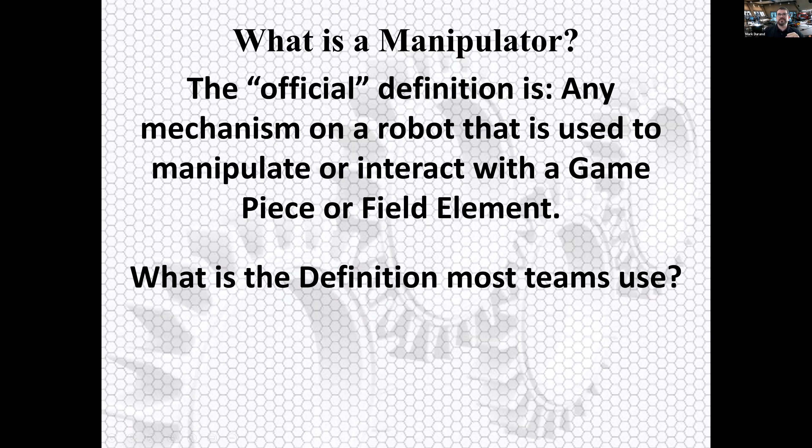The other things we're going to do today, there's going to be more annotation and stamps on the screen because it's hard with the chat. Most kids, they're like, it's the thing that's not the drivetrain—there's drivetrain and then everything else. This session we're talking about game field, and the first question you have to ask yourself is, what are you manipulating? In this one, we're talking more about field elements.

Most of the games in the history of FIRST were game piece only. This is the first year, '92, Maize Craze, they had to drive through corn, that was crazy. The Rug Rage, this was weird. In these competitions, you were on your own—it was one bot, like this one was four bots, each bot was on their own. Same thing with the corn situation. This one was interesting, it's like a giant circle. But again, game pieces only, there was no real manipulation of the field.

95 was game piece only, same for 96 and 97. You'll see, if you've been to my other presentations, that there's a lot of situations where you have these giant exercise balls, and those come up a lot.

Ladder Logic, 1998, that was game pieces only. Double Trouble, same thing here. And now 99, that was a weird year with the floppies.

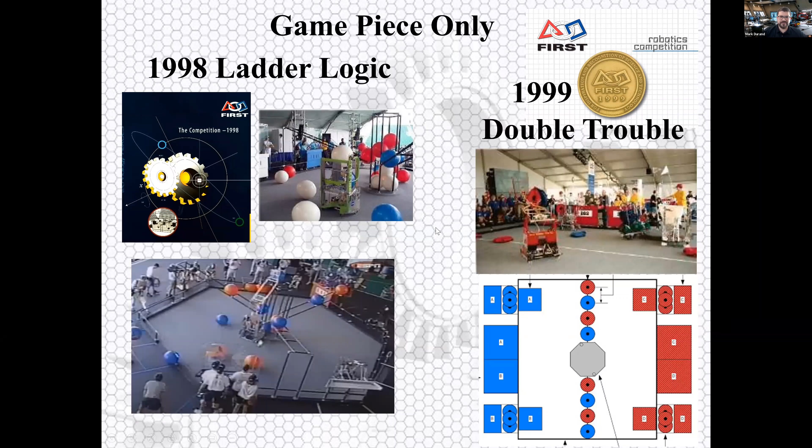But finally, 2001 was the first year we had field elements to manipulate, which was a balance bridge. For those of you this looks familiar, this is the exact bridge used in 2012 Rebound Rumble, which you'll see in a little bit.

First time we did a bar hang was 2000, and that one you're going to be watching for.

Zone Zeal, this is the one people talk about as the famous chokehold maneuver, where a team grabbed all three scoring containers and yanked them over to their own side, but it was game piece only. Same thing with Stack Attack. There were totes, and you could just drive up full on and bash into them, which would have been really fun.

This one, 2004 bar hang. Now I've got to show you the most insane recovery. This is from 2004. We had digital cameras, but digital video was not as common.

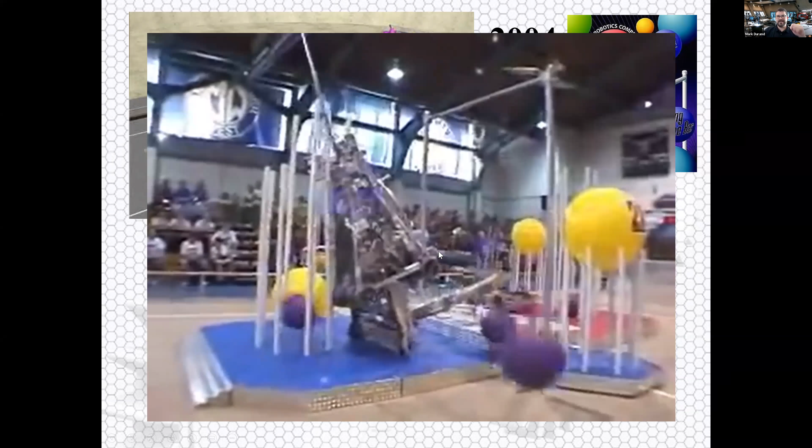They do a replay in a moment here. All right, sorry, the audio is still going.

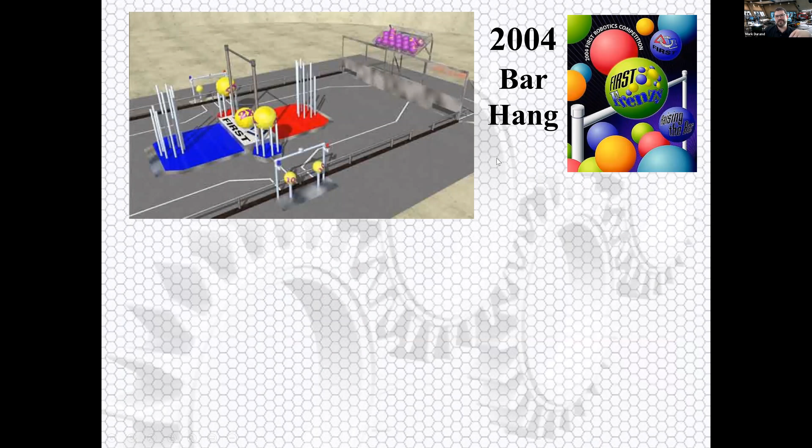I can't imagine what it would have been like to be that driver for that robot, or for the team or coach, when that robot looked like it was about to tip over, but somehow managed. That was one of the first bar hangs where it was crazy high up. The other ones were pretty low down.

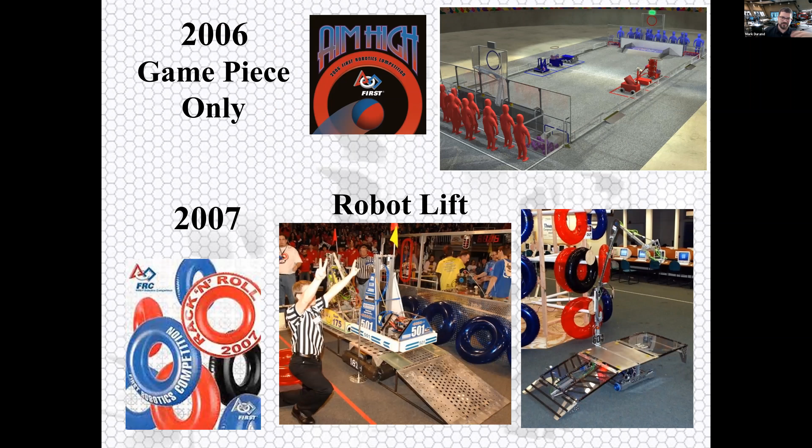2005 was game pieces only. Same. This one, 2007, for those of you who built ramps, which is now in my team, we had ramps and they were disastrous for us. Power Up was not the first year teams were encouraged to have robots drive up on top of other robots - it happened in Rack and Roll in 2007.

The main reason I go through all of these things is because there's nothing new under the sun. When you see a challenge, like in 2012 with the balance bridge, if you didn't go back and look at how teams addressed that the first time, there's a lot of knowledge that's missed. Same thing here - my team, if you don't look back at what teams did in 2007 for getting a robot up off the ground, then you're at a disadvantage.

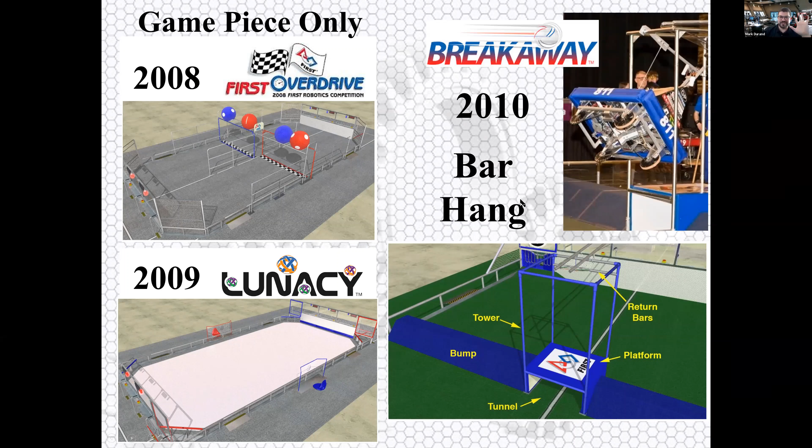2008 and 9 were game piece only. 2010, this was my first year as coach, and I just thought - in this year there was an end game and the robot had to climb and hang from this bar, and you'll see a beautiful example of a robot that does that. But here's the thing - I thought end games were just always the thing, because this was my first year coaching and there was an end game.

2011, you had to manipulate - there was a post, you had to send a mini bot flying up that. 2012, there was a balance bridge.

Right here, if you didn't watch - every year after the game animation release there's Field Element videos that first puts out. If you did not look at those, you wouldn't have known that if you're building one of these at home, it was a 4x8 sheet of plywood, and it had to be strong enough to support 2 batteries 28 inches away from the center. A lot of teams built manipulators that couldn't push with enough force.

The other thing you may not notice in this game - there was a 4-inch barrier, identical to the barrier we had to cross in 2016 during Stronghold. That was one of the defenses.

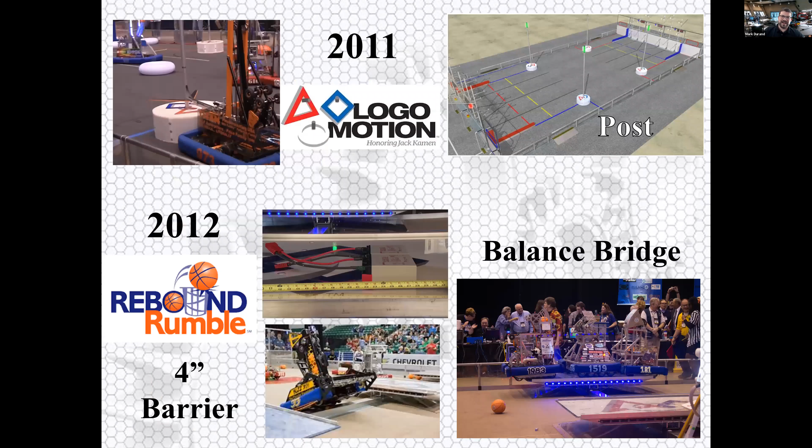2013 pyramids. Now this is why I was shocked when in 2014 there was no endgame. Also, there was this giant bar - 2014 Aerial Assist, we had to throw the giant things over, and there was this giant bar. I thought surely we had to hang from that sucker, and I was convinced the entire season they were going to come out with an update like, oh yeah, there's an end game, but alas, never.

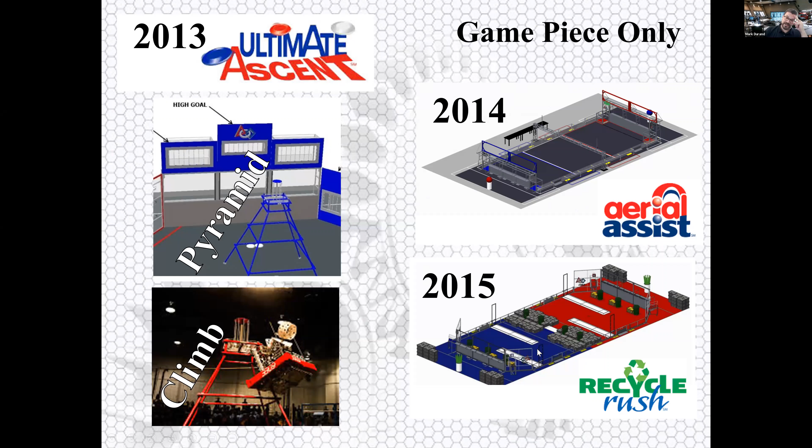2015, no end game, no hanging, no field element mechanism. 2016, they made up for everything - there were barriers and also a hang on top of that. 17, rope climb, one of the only times we had to do a straight up rope climb.

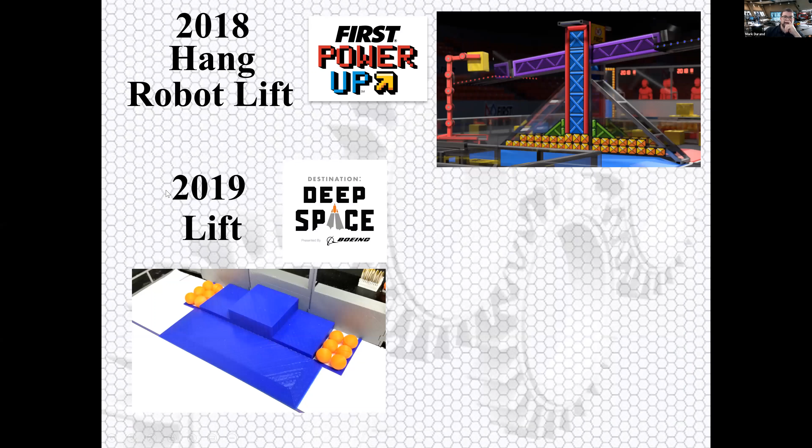2018 was power up, hang from a small bar, and also lift robots up off the ground. Those are not common. 2019 was lift your own robot. 2020, a hang and a spin. This is the first time they've had us spin a field element on the field.

With all of these, I want you to think about the history first. You want to be inventive, creative as you're trying to design your own game, but you also kind of want it to be recognizable as a FIRST game.

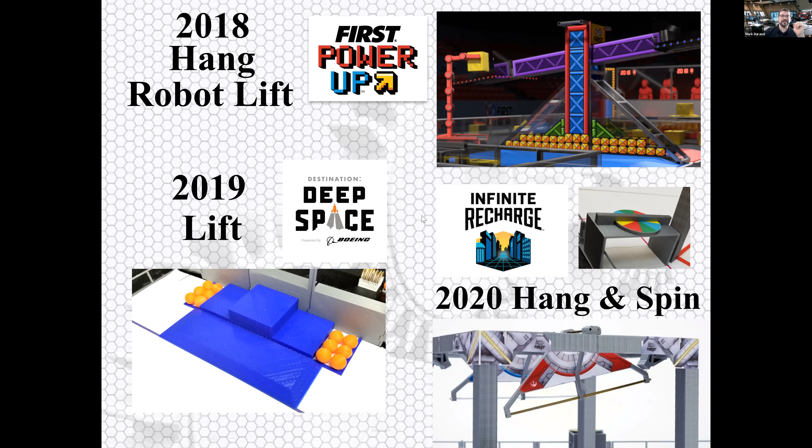All right, so here's the question. You should see an annotate button at the top of your screen, and you should be able to use a stamp, like an arrow, to show me how many times do you think we were required to do a bar hang or hang, lift your robot. Just the grab a bar and pull down.

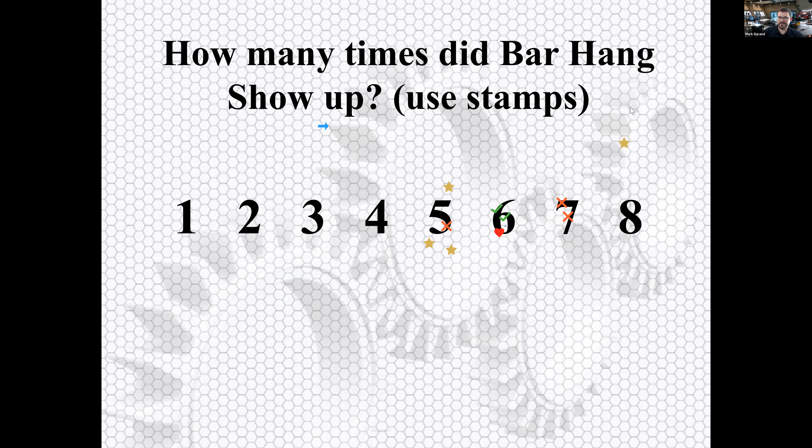I will say this though, these are all really, really good. I think you can make an argument that it was only 5. Some people might even be able to argue 7. But based on my count, there are 6 times we were asked to do a bar hang, specifically a bar hang.

So what I want you to note is these are specifically ones where you had to grab onto a physical bar and lift it. The other thing is that some people might get - so there were 2 times we were asked to climb.

You'll notice that I put Ultimate Ascent into both of these. That's because Steamworks, I would say, is an outlier because we had to climb a rope, and that wasn't a bar. The reason why Ultimate Ascent is in 2 categories is because every one of the first 5 in this category of bar hang, it was just grab a bar and lift up. But Ultimate Ascent was more complicated - you had to grab a bar and then climb to the next one and climb to the next one. So that's why I have Ultimate Ascent in 2 categories.

So if you don't include Ultimate Ascent as just a straight up bar hang, it's 5. If you consider Steamworks to be a climb rather than a bar, then it's 6. So anywhere from 5 to 7 are all correct.

The balance bridge occurred twice, and a robot lift occurred 3 times. In 2 of those it was lift other robots, and 1 of those was lift your own robot. I say all this because I want you to think about these as you're trying to design your own game. So that's all the preamble.

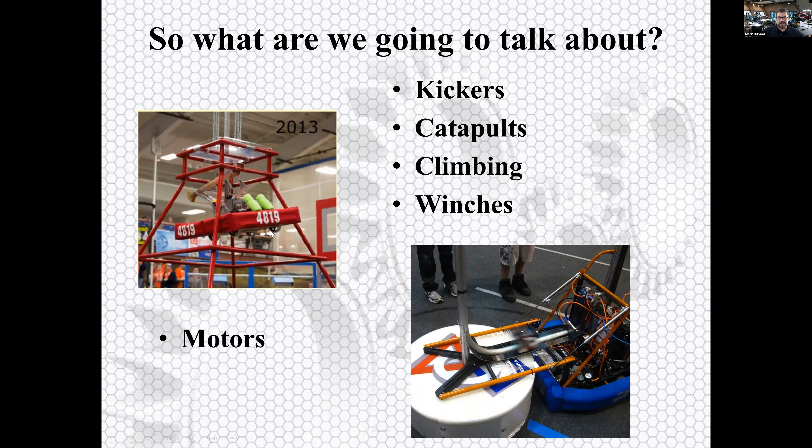I want to get to what we're going to talk about: kickers, catapults, climbing, and winches, and how we do that. These are some situations we're going to be going into. Then we're going to talk about motors and decisions. And I've got a couple other spots where I'm going to stop and ask you guys to do the stamp question again.

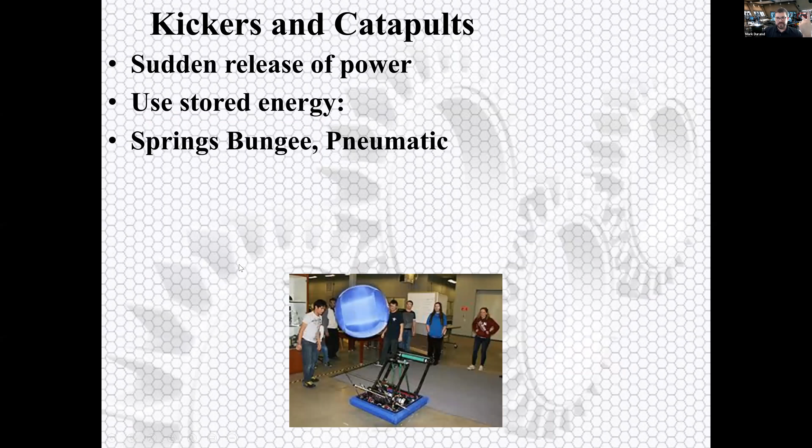So kickers - it's all about a sudden release of power. You're going to want to use stored energy if you can, and what that means is either springs, bungees, or pneumatics. You want to have a good latch mechanism to hold it because that's going to be kind of scary and dangerous. You want a secure lock for safety, and this is the huge problem: you want it to be extremely secure and locked, but you also want a fast, good release. Those are competing needs that you have for your design. This is FIRST, and everything has those.

This is a design from the Minnesota team.

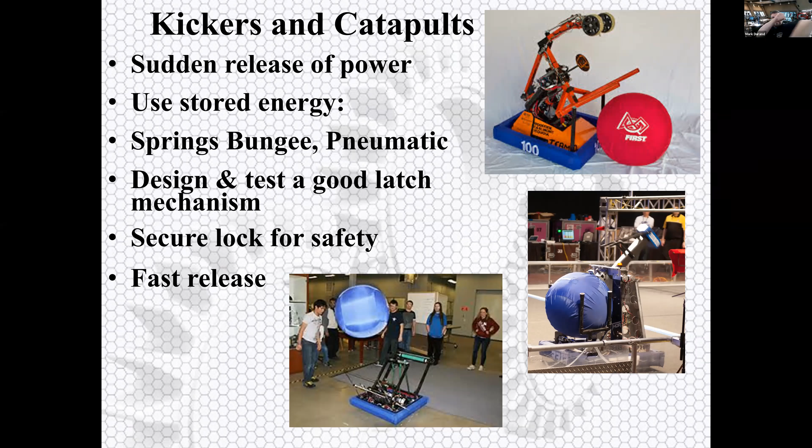They called this Thor's hammer. They're out of Alexandria. It was a really simple, sweet, beautiful design using stored energy. The hammer just had a motor with a mechanism, and once it got past here, there was a little bolt or post that held it. Once it got there, the thing would just smack. Very brilliant, very simple, very easy to reset.

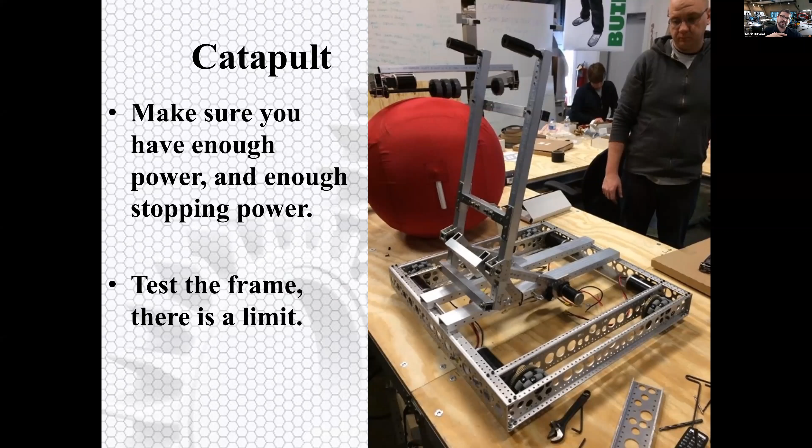Now, catapults. Make sure you have enough power and enough stopping power. This is the thing people don't always think about. They calculate everything needed to send the game piece flying, but make sure your frame can handle it. There was a Robot in 3 Days team building a catapult for Aerial Assist, and they bent the bejeebers out of their frame. You've got to be careful and test it a lot.

The other problem with kickers and catapults is how do you reload them? These are very powerful, very massive amounts of stored energy, so you want a very nice, simple, easy way.

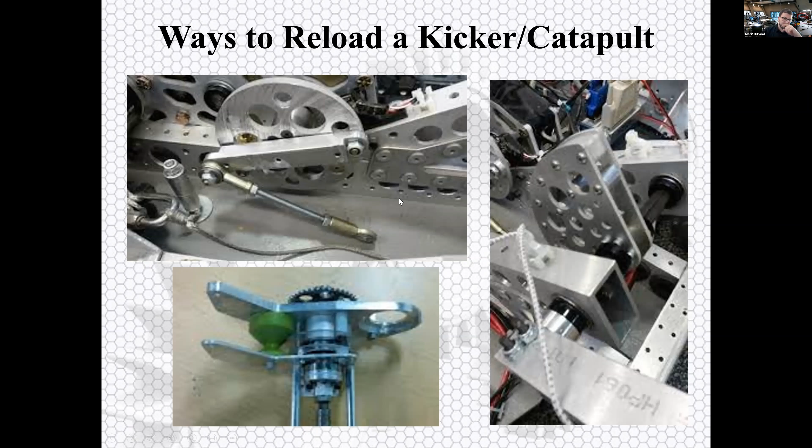This is a couple we're going to get into. These are cam gears, or the choo-choo mechanism, and you can see right here. You just have a motor on a gear, and it's connected at this pin and here, and then this bolt, as it rotates, pulls it down. This one shows it in motion. So once it gets there, whing, the sucker just sends it flying.

Now, this is glorious and wonderful. And yes, thank you—please, if you love these designs, or if you've used them and think they're great, somebody just put a stamp on there. That's nice, I like that.

And this has a lot of benefits. The one major drawback people point out, and you have to be careful for, is you can only support this gear on one side, and that's problematic. There's a lot of forces going on, so that's something to be careful of—contemplate it, think about it, and make sure you're planning for that and can handle it.

This is another type of mechanism where they just have a cam gear, rotating—or snail gear, or bullion gear, depending on what you want to call it. But essentially it all works the same. This one, I kind of love this design. I'm a big fan of this.

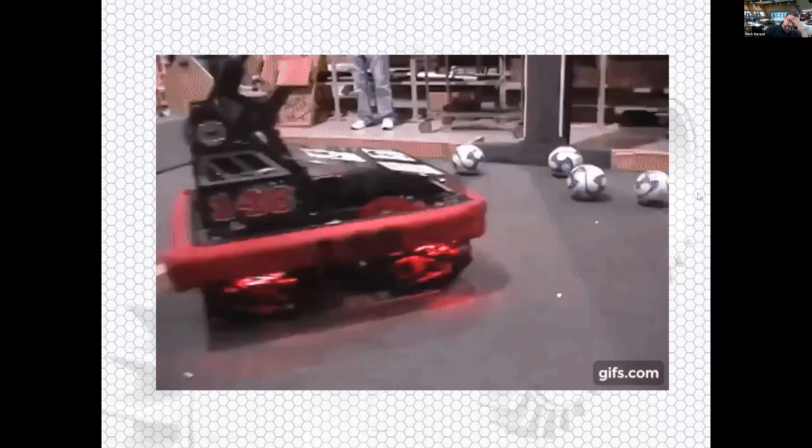This is the robot from the Robo Wranglers, Team 148 out of Texas, and this was the design they did for Breakaway. You'll see that one a little bit later on when they did their climbing. So climbing—this one's a lot of fun. We've had to do this quite a bit.

There's some scary options like this, and some other terrifying ones, but there's two main methods: pneumatic pistons, and a winch.

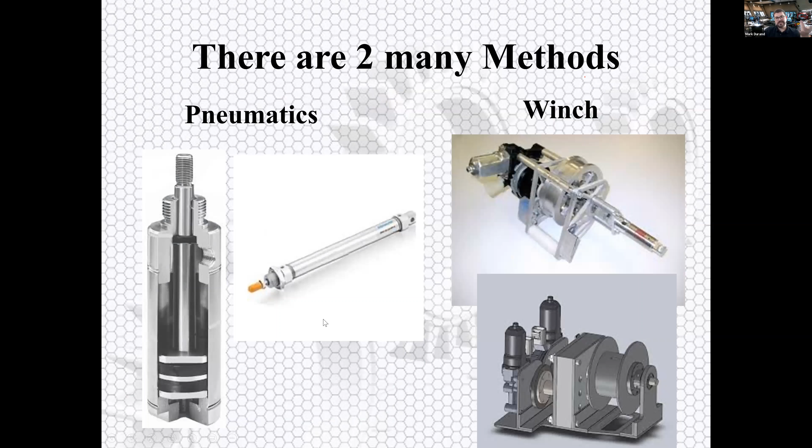Now we're going to try to start a fight here. Vote—what do you think is best for trying to lift your robot in a straight bar lift? Pneumatics or winch? Vote with the stamps—hearts, check marks, or arrows. Some people are typing into the chat. I got 2 votes for winch in the chat. Really? Okay, good. Wow, really? This will be good news for my team, my students.

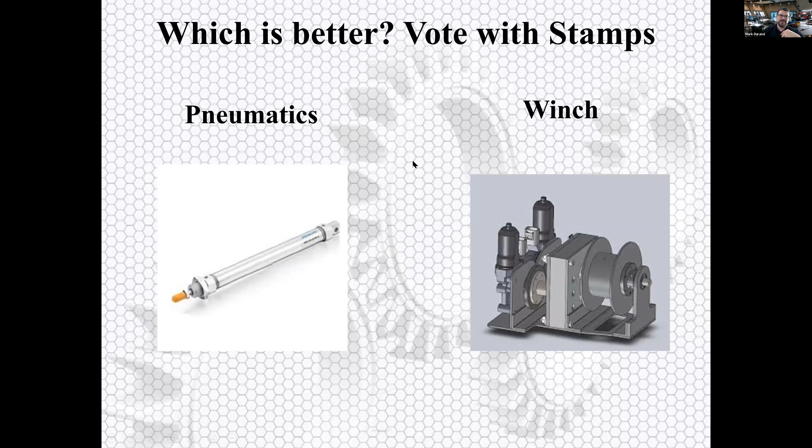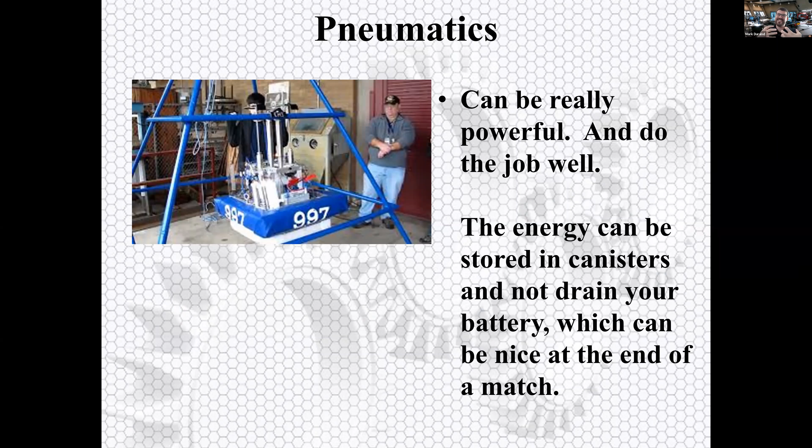Yes, okay, David, correct—the question is how fast? Whenever anybody first asks this, it's always a trick question, because the answer is, well, that depends on what you want. Personally, I'm not a huge fan of pneumatics—I know they're glorious and wonderful, but my problem is we always have like one need, not five. If you're just putting pneumatics on for one thing, it can be problematic or difficult. But there are a lot of benefits to pneumatic pistons for a climb, mostly because climbs are required at the end of the game, almost always, and you can have a ton of stored energy in those pistons. At the end of the game, some teams have batteries running low—you've maxed that sucker out driving around like a maniac, and there's nothing left to lift the bot, which takes a lot of juice. So stored energy is very, very helpful.

Here's the question though—I love the look on that kid's face, that's priceless. You can tell this is the first time they've tested this because he looks terrified. Also, look at those pistons—that's insane, that is an insane length. And some teams are like, you think that's big? We got like 4-foot ones. And I'm like, okay, great, that's amazing. But that's always the question you have to figure out: if the pistons can handle the distance, if you can afford them, we got a question.

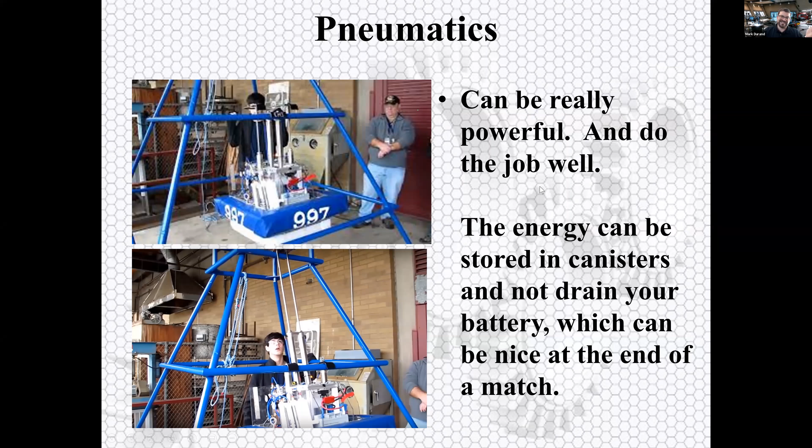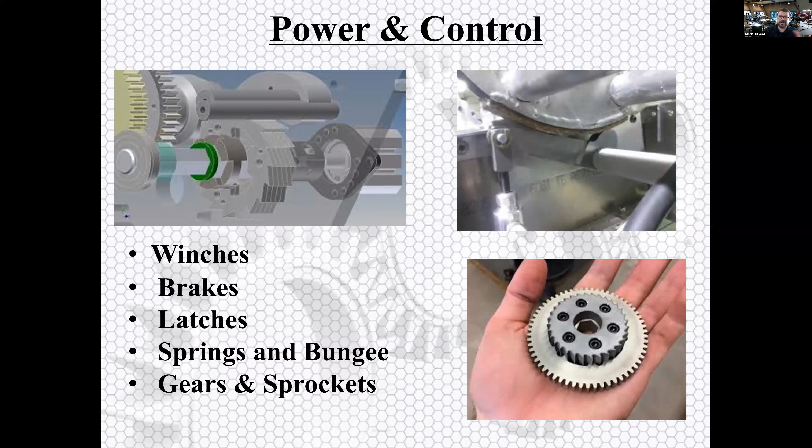Winches. When it comes to winches, it can be a lot more complicated. You need to have brakes, you need to talk about latches. We're going to talk about using them as springs and bungees with gears and sprockets and how those are different. Winches are really great if you need a high torque application. This is another picture of a team climbing in 2010, breakaway.

The other thing that's nice about winches is you can keep it really small. Pistons, you basically have to be able to be half the height of your total height, so that can be limiting and problematic. Winches can be really nice for that.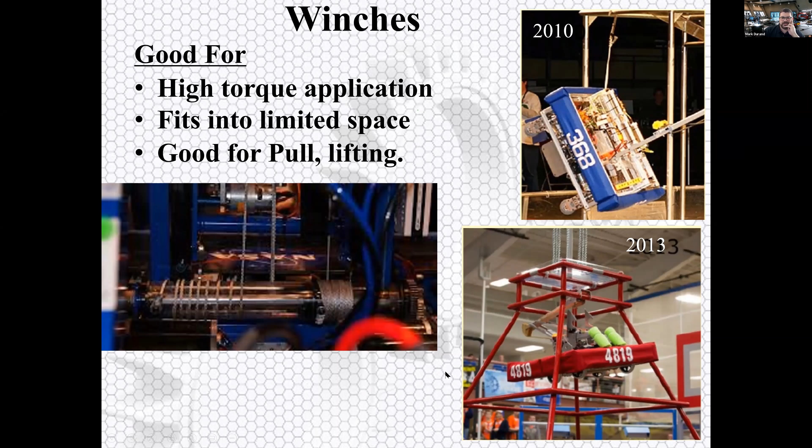Now here's the other: hanging and climbing. This team, if you can climb on a scissor lift, God bless you, that's amazing, that is a task. That's a big ask for a scissor lift, but there are teams that have done amazing with that. This is also pretty impressive here, climbing while lifting another robot. That's some intense stuff.

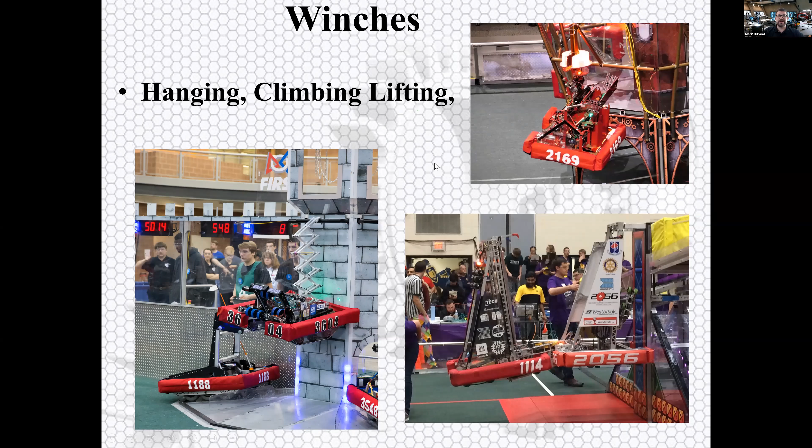And this is where, like this year with Steamworks, you pretty much had to build a winch. There was no other way to climb up a rope than a winch, essentially.

Now when it comes to winches there's a lot of complexity, or there can be. You want to make sure that cable is secured. The last thing you want is for it to grab some wires and rip those out of your robot as they're moving around. You have to be careful. Depending upon what you're using, you need to leave room on the drum, because if you're using a strap, which is what we prefer if we can, the diameter changes as the drum winds up the strap.

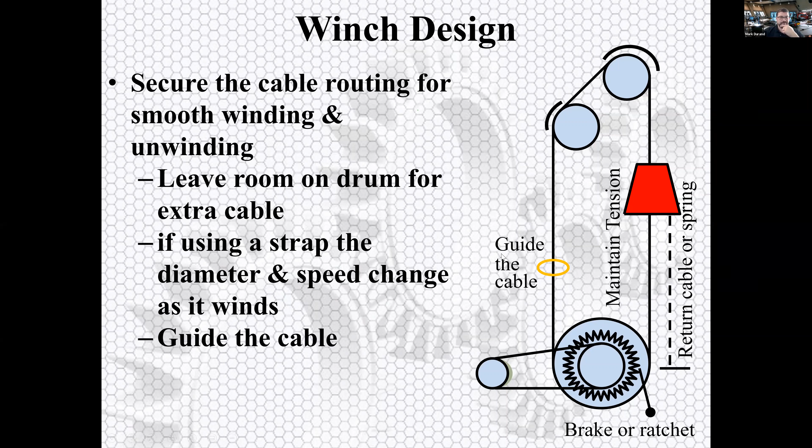So make sure there's guide cables, and make sure you always have tension. It's pretty easy to add a little tensioner on a spring or something somewhere. That's always a nice thing to have in there.

For the return, some people will use weights. Usually we're up against 120, but you can use weights or springs. Springs are very easy — don't make your motor do everything. It's not the end of the world to throw some bungee or surgical tubing on that sucker to give your motor a little extra help.

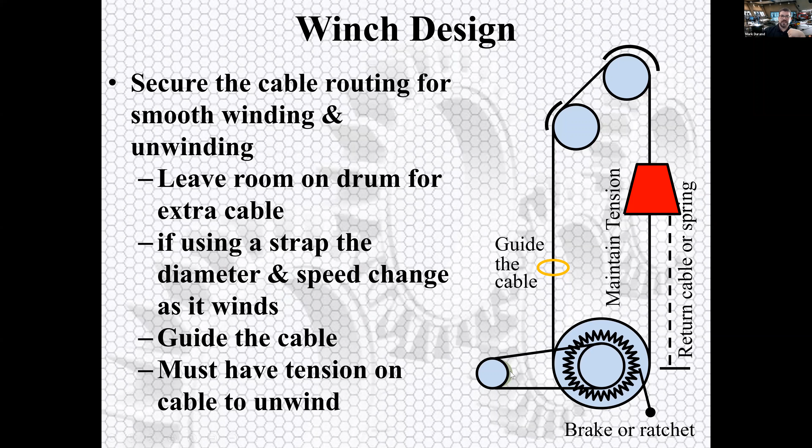But the other thing we're going to talk a lot about is you need to have some sort of brake or ratchet. The last thing you want is to have your motors try to hold the weight of your robot. This is a huge no-no — you're going to blow your motors out.

Now, the other thing: you want to have cable in both directions. I know we're tempted to think we just need to pull it up, or in this case pull down to lift the robot up, and gravity will do that. No, it won't. I know students are like, well gravity's always there, it's reliable. And I'm like, yeah, but no, it's not. It will screw you over. And if you've been to my other presentations, you know that.

It's Murphy's Law — something can go wrong, it will. The other thing you need to know: you should very carefully calculate the torque, calculate the speed, figure out exactly what you need, how much you need. Our rule of thumb is double it, and I'll talk about that a little bit more when I talk about the motors. So gravity return is not recommended.

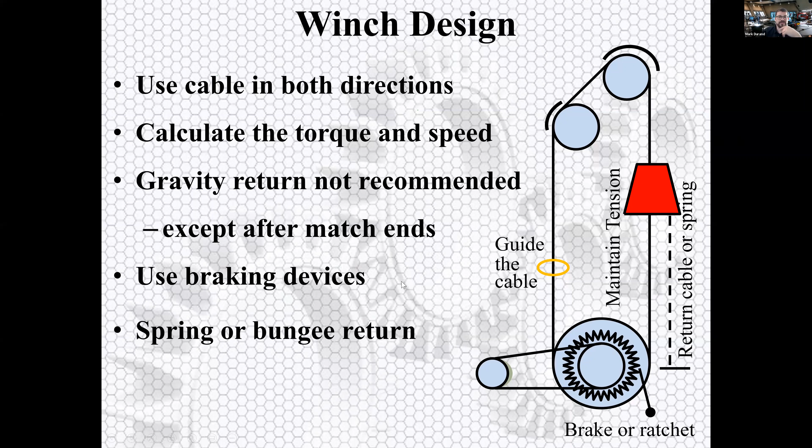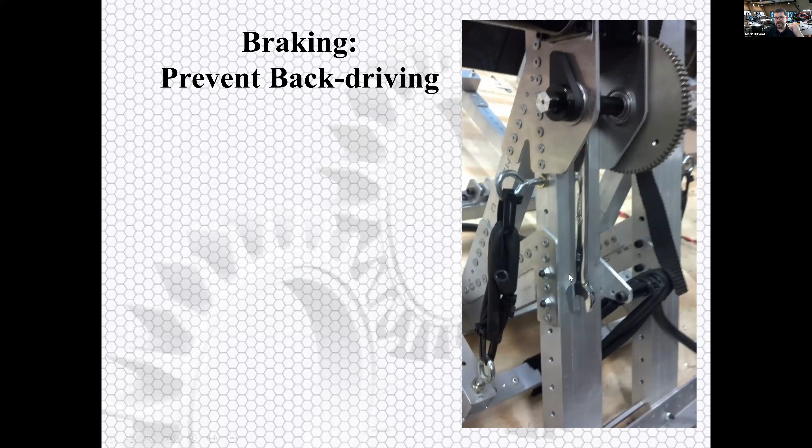Braking device — we'll talk about the braking device in just a little bit. Here's another option. You need to have some sort of braking to make sure you don't have any backdrive. In this situation, this is a catapult, and they've just done lots of bungee here, and you can see, it's sometimes hard to see, but there's a ratchet device.

They took a ratchet, like just a tool, and threw it on the robot because they're using a 1/2-inch hex, so they just used a 1/2-inch wrench. Now, some people will say tools don't belong on the robots — I think Vex has something like that on their website. On the one hand, I totally get it. On the other hand, it works, it works really well, everybody has one, you can get them very affordably. I don't know, man, if you want to be fancy about it, I guess, lop off this part and bolt it down somehow. But if it works, it works. I don't really see the reason behind making teams feel bad for using a functional device.

You have to be careful about this stuff. You don't want — there are some wrenches that are very, very simple, and they're not able to handle the force.

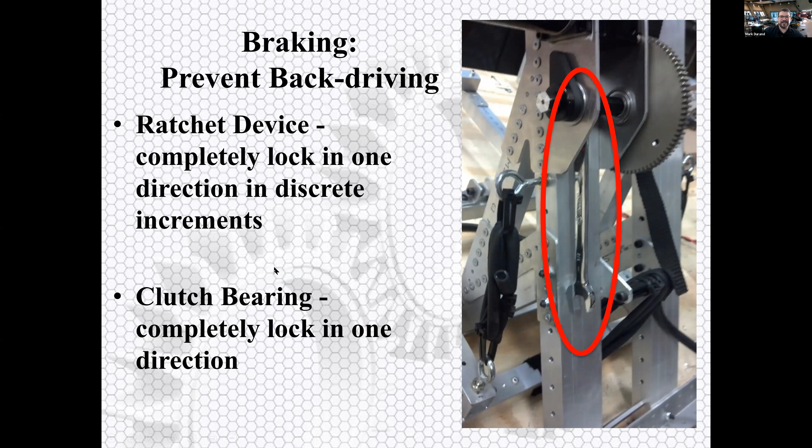So you want to test that and make sure. Our rule of thumb, I'm about 2 robots is how I measure my weight, so on my team the rule is it has to be able to hold my weight. If I can be suspended from it, then it's fine. Maybe you don't have situations like that.

Here's a couple more. If you want to get fancy, you can buy a ratchet sprocket, mount that, put some sort of device on there. This is a modified version that a team put onto their robot just from a ratchet strap, for tie downs. We've not used this, but I really kind of want to use this.

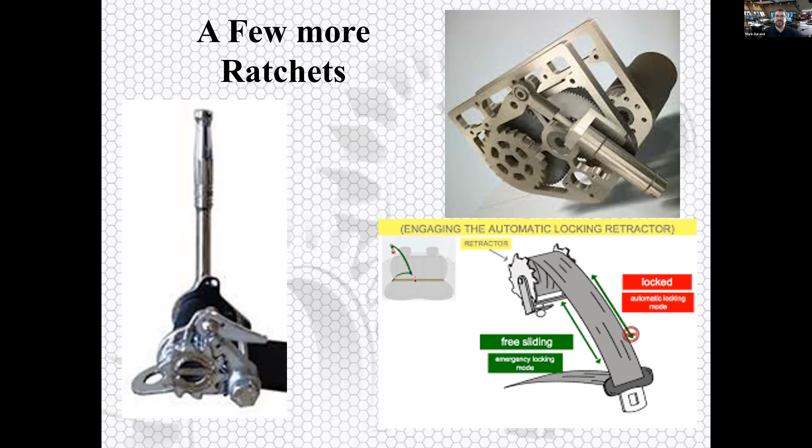Just the seatbelt from a car. The main reason I'm intrigued, I always thought it'd be really sweet to have a seatbelt ratchet mechanism on the robot, because seatbelts rely on inertia - the car's inertia is what clicks the ratchet in. I feel like you could theoretically, without too much difficulty, set it up so that the automatic locking mechanism engages once your robot leaves the ground, and then you climb up. It could be really nice. I don't know, we haven't done it, we haven't seen it, but I am intrigued.

This is another image from If It Works, Shut Up. This is technically a clutch, like a disc brake you see on a bicycle, because this team literally just ripped a bike brake off of a bicycle. And you know what, that works. If it works, yeah, I got no problem with that. But this may not be the most reliable thing.

The other thing is any gearbox that cannot be back driven. Some teams would be like, oh it's fine, we'll use the window motors or seat motors or something like that, because they're not back driven, and that's fine, that's awesome. Except the problem is, if a motor can't be back driven, that means it's going to be extremely inefficient if you look up the numbers on that motor. When you're talking about lifting your robot off the ground, you really want it to be as efficient as possible so you can get your robot up off the ground. Otherwise it's fairly problematic.

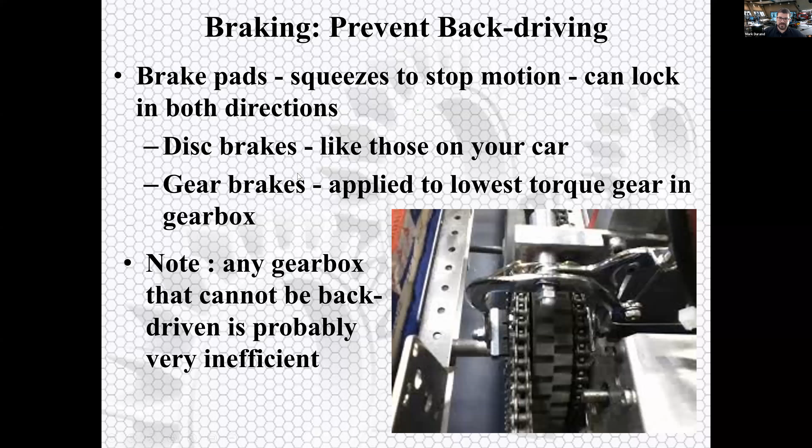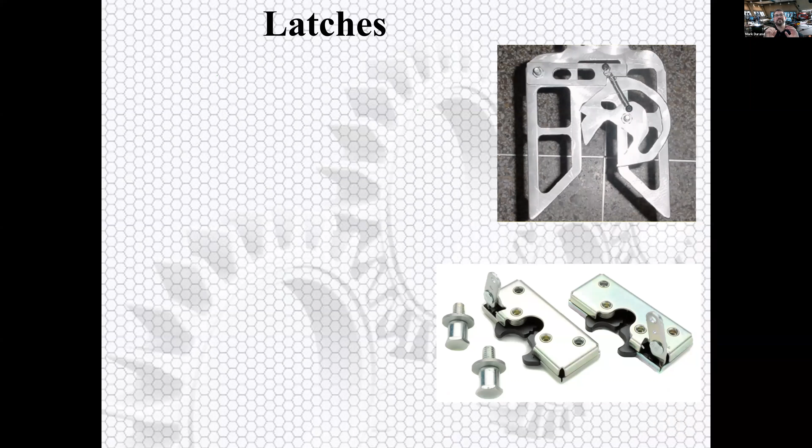Latches. Last year, for the 2020 Infinite Recharge, we built this gloriously complicated, lovely latching mechanism, and then when we tried it out, we realized we didn't need it. But this can be extremely helpful in certain games, especially if you ever have to do a lift off of a bar that is vertical, and I'll show you that in just a moment here - it's on the slide.

There's a lot of teams that just do hooks, and I get it, that makes sense. Except you see a lot of times, sometimes those hooks fail, sometimes they fall off. A latch mechanism from below can be very, very effective, because you don't have to do that. You've probably seen teams trying to get onto the bar and they miss - it's problematic. This one you see in the bottom of the screen is from a car door, and if it's strong enough to hold me as I go up against the door when we're going around a corner, it's probably fine for the robot. There are other similar mechanisms where teams will just have a Y, and it'll go up to the bar, and the latch clicks on like handcuffs.

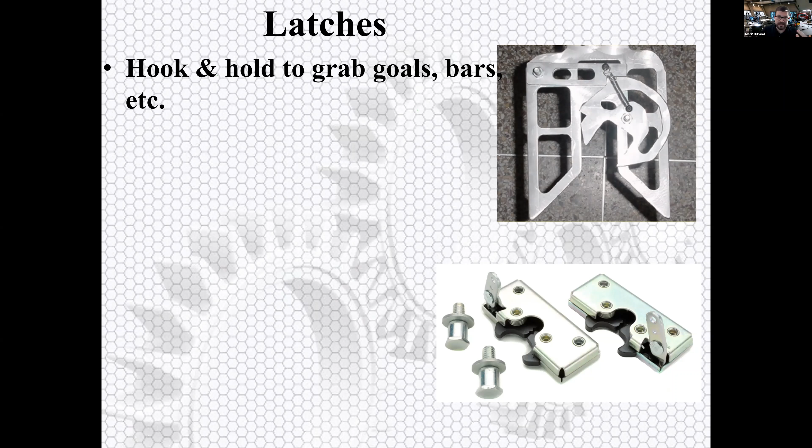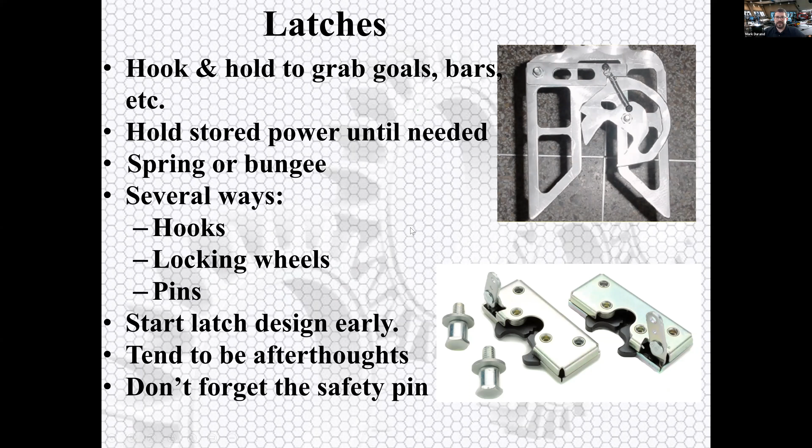They're fairly simple, okay, it depends on how you build them. But there's a lot of ones you can just get off the shelf. The thing is, and this happened to our team one time, they tend to be an afterthought, and that's not a good idea - they should be front and center. This is what I'm talking about: this team, Robo Wranglers out of Texas.

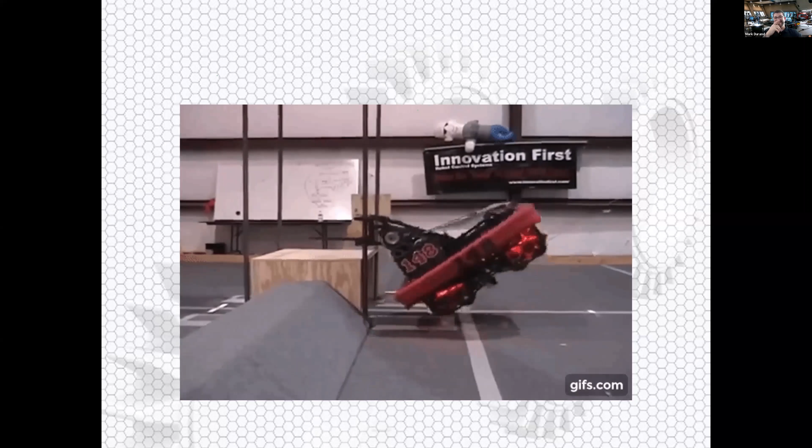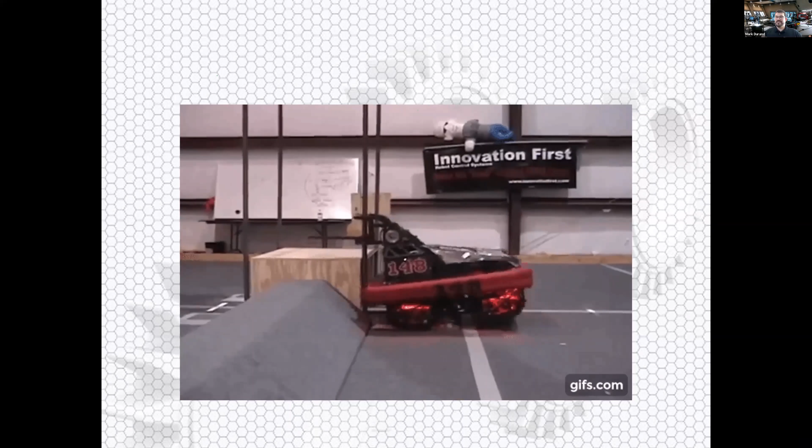This blew me away, honestly it's the most insane method. They're like, how about we just lift the robot on a pivot? And what you can't see in this short clip is that they put their numbers on the bottom of the robot, so that when they did this flip maneuver, they would do it pointing at the other alliance. So the other alliance would see their numbers, which, near as I can tell, is the closest a robot gets to mooning another team. So basically that's glorious, and I love them for it.

All right, so those are the mechanisms we use for interacting. So this is a question: we're going to move on to power, motors, things like that, and how they relate, because that can be an issue with a lot of teams in a situation.

When you ask a group of First Robotics students what does power mean, you usually get answers like faster, which makes sense but isn't true. Then they're like bigger, which isn't even close. Or more electricity, or just more. This is a problem because it's a huge concept in First.

I just started. Oh, okay. Gold star. Nice. Okay. There you go.

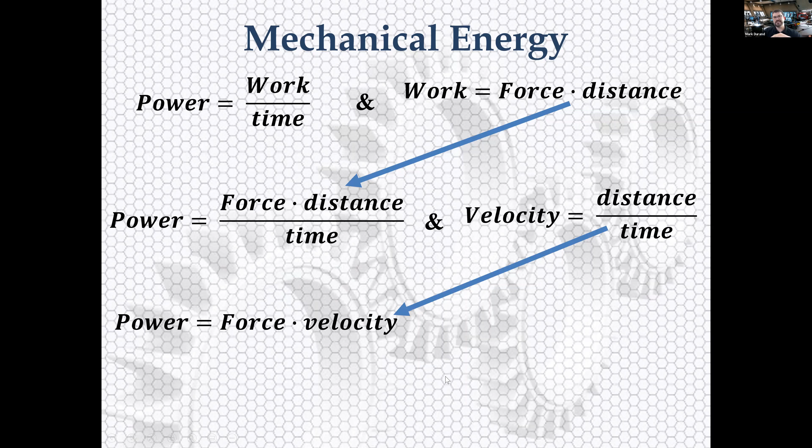So that's where the confusion comes from. Power equals work over time, work equals force times distance. So if you substitute force times distance in for work, you get power equals force times distance over time. And if velocity is distance over time, you can substitute velocity in for distance over time. So power equals force times velocity, and power equals current times voltage.

But the thing you have to realize is you're only given so much current and so much voltage. You've got to make sure and do an electrical audit, and I'll show you some slides with information on that. But the thing I want you to understand is you have got to choose between force and speed. You cannot have both. Your motor has a power rating, the watts. Watts are joules per second, it's energy over time. And if you don't run through the calculations, you're going to be in trouble.

There are a lot of times teams will have an elevator for their game piece, and they want it to go really fast - that's perfect, that's great, that's sweet, that makes sense. Except then they're like, and we'll also use this to grab onto the bar and climb. That requires a massive amount of force. And you must choose: you're either going to have a game piece manipulator that's slower than you want, or a lifting arm bar that's not as forceful as you want, it doesn't give you as much force. So this can be problematic.

And there are some teams that just say we blow out motors, and that's fine. Okay, if your solution is to buy more motors, that's probably not the best solution. You can do it with one motor, but you need to have gearboxes or something like that.

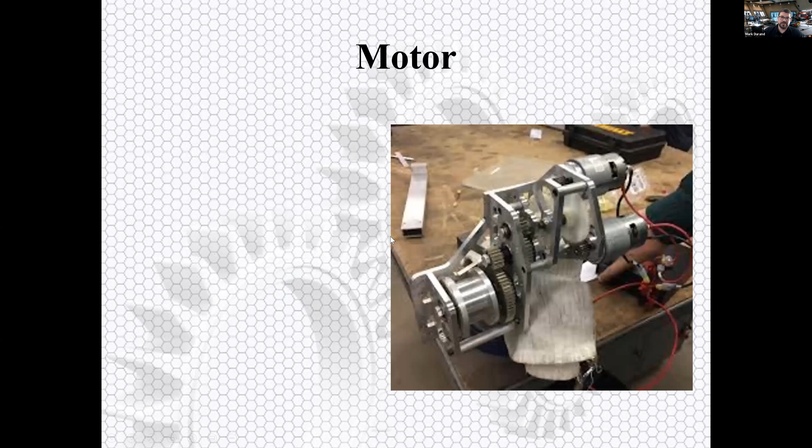Speaking of motors, a lot of teams are pretty good about doing calculations and finding the right motor, but then we don't often take into consideration all the gear reductions we're doing. Our rule of thumb on my team, and what's recommended by most teams, is figure out how much force you need and double it.

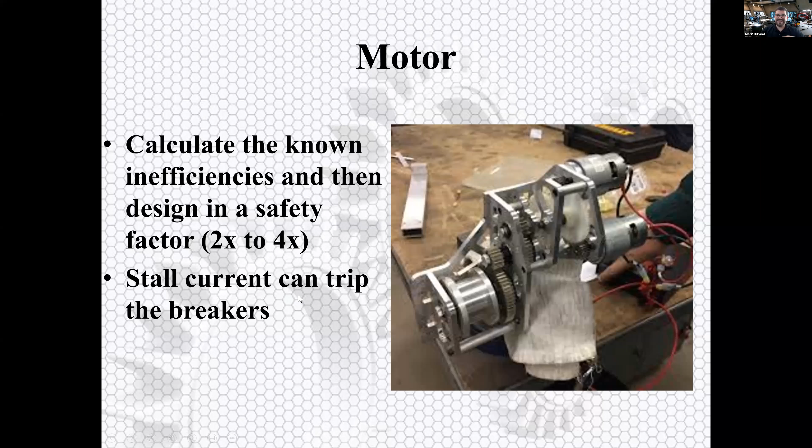Something else I've seen teams do, and my students do all the time - they calculate the force needed for the motor, but they forget this is going to be connected to a gear. Well, force changes as distance changes, that's work, force times distance. So the farther away you get from the point of rotation, the weaker the force is. You have to make sure you calculate that in. Also, stall current - you've got to look at that. Stall current can blow out, it'll trip your breaker.

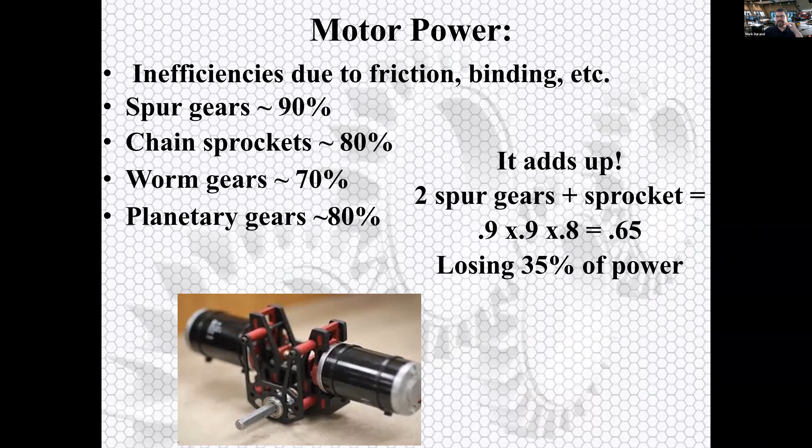Inefficiencies due to binding, so spur gears - it's kind of like the classic 90%. Chain sprocket, worm gear, planetary gears. When you think about this, if you're doing a gear reduction with a couple of sprockets or gears inside your gearbox, you can lose up to 35% of your power. That is huge, especially if you were just barely making it. You don't want to overtax your motors.

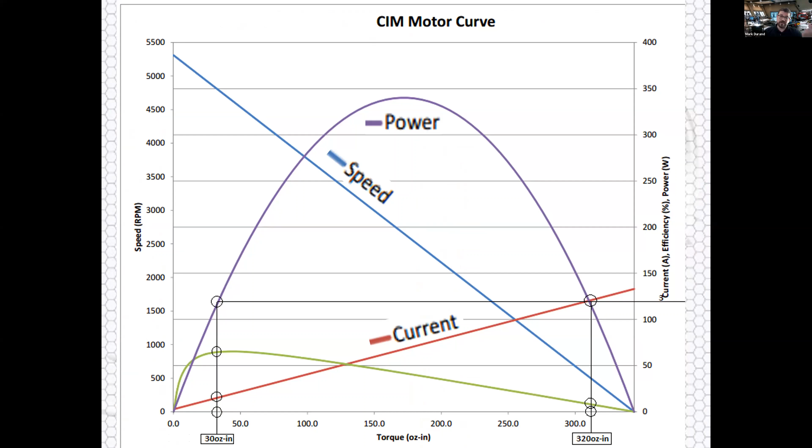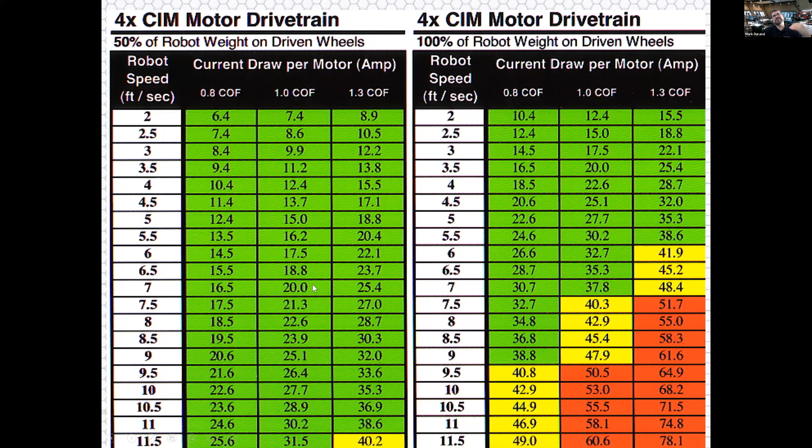This is a chart where this talks about if you have 4 CIMs and you're driving 50% of the weight. This is a classic chart - if you've not seen it, somebody on your team should have seen this. It's talking about how fast you're pulling the robot. Basically, it's doing calculations for you with current draws. And then you'll see down here, we have situations where bad - basically red's bad, you can probably figure that out. But just make sure you know the limitations of your robot before you start driving it up against the wall.

Now, question: so how do you decide? Well, if you've been watching and listening along, there's a theme. The answer is it depends, and there are options. So it's a lot more than just thinking about what's the best manipulator.

So my team, what we do when we start designing for manipulators, I make them go through this slideshow because I have it accessible. I make them go look and research and find out, are there other years that have had similar situations going on? Look for those. And you start with all the manipulators that exist, and you got to do a lot of research to get that number going. Then you have to look at what are the manipulators that work specifically for this game - be it the game piece and/or the field manipulation that this PowerPoint slide's more focused on.

And this is very important: your strategy. And that's what a lot of teams don't necessarily like - this is where it gets dicey and problematic. Because my team, whenever we analyze the game, kids always want to jump straight to designing and building, and we could build this thing to do this thing. And I'm like, okay, wait, pause - what's the strategy? What's the purpose?

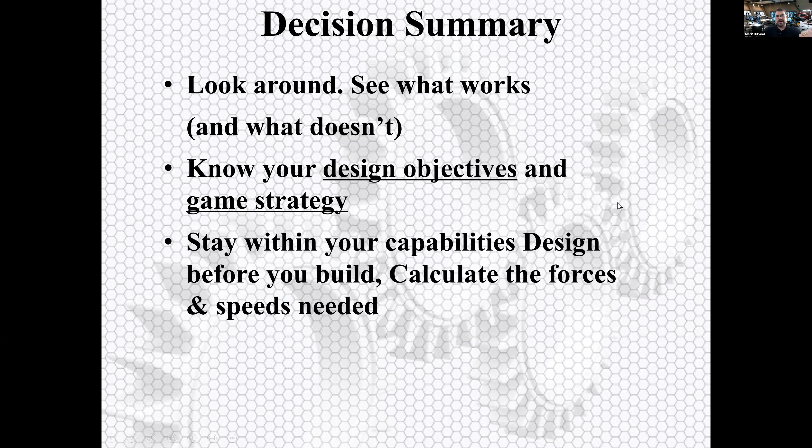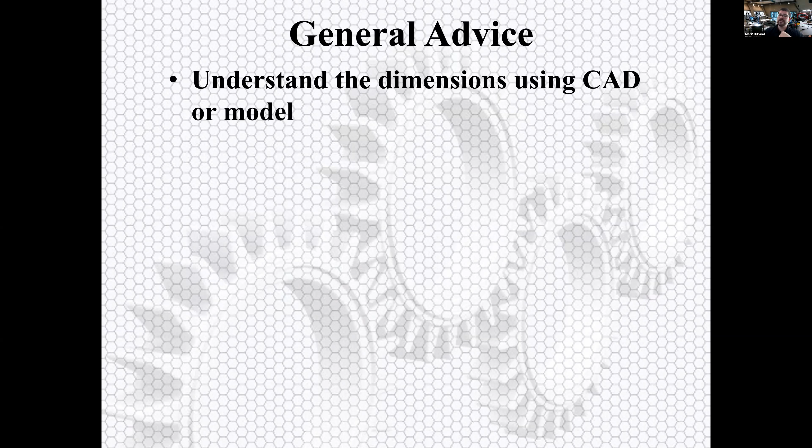Some general advice. I know everybody says this, but they say it a lot because teams don't necessarily follow it. Understand the dimensions using CAD, make sure you know that. Make sure you've got somebody on a spreadsheet with the motors doing all those calculations for you. Keep it simple and make it well.

Some of you have probably heard this already, but poor craftsmanship can ruin the best design. We had one year, the ramps, power up year. We had a mentor from another team come over and look at our ramps. He asked one of our kids a bunch of questions. He's like, I love this design, it's beautiful. Their robot was very similar, had almost the exact same ramps, but a different mechanism for lifting it.

I pointed out to this mentor, who was being very kind, I'm like, yes, but ours don't work. He's like, oh, you built it horribly, but it's a brilliant idea. The kid and I were like, thank you? Yeah, I'm gonna go with thank you. We had a great design that we had poorly executed. That's the nature of the beast.

You need to have all things together. Refine the design.

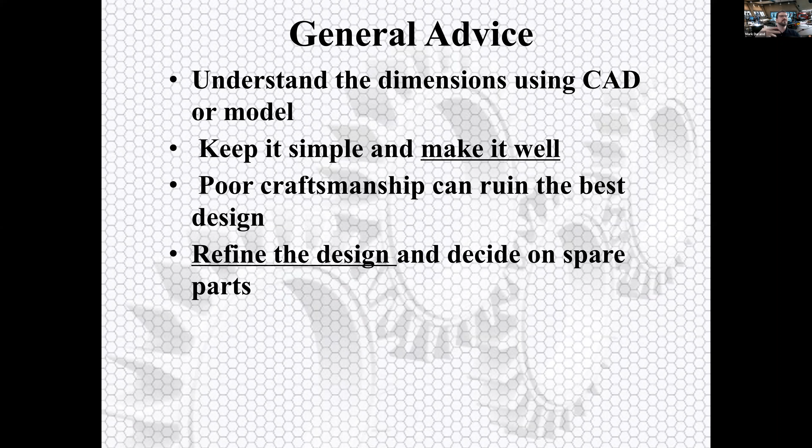We all are in that situation where we tested and it works great and we're so happy and it's so exciting, except what we don't realize is it's going to fail on the 10th one because we're asking too much of our motors. Make sure you figure out what's going on, make sure you're able to check everything, get spare parts, figure out stuff.

There's an old joke about a mentor stress testing the robot, throwing all of his weight on it. And the kid's like, what are you doing? Stop it, you're going to break it. He's like, better to break it now than have it break during competition. We know that thought process, but the kid's like, hey, how about we just don't break it? Get off the robot. So you've got to balance that with stress tests.

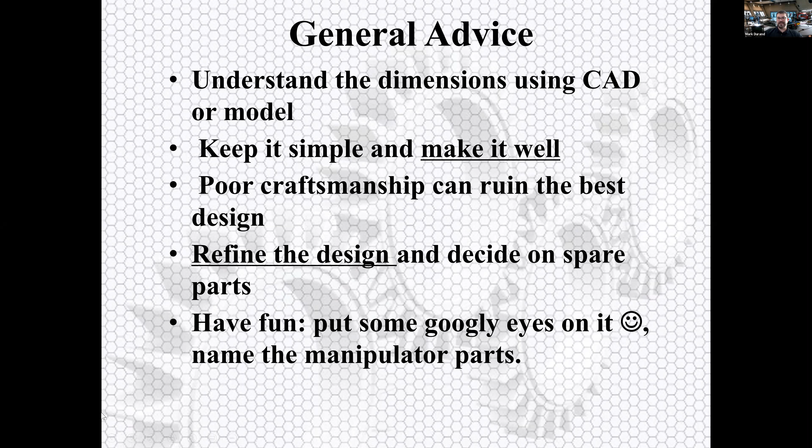As I was doing research, it appears — I wanted to ask Andy this question when he was on beforehand, but I didn't want to interrupt with this stuff — it appears that Bruce took a lot of that from a PowerPoint that Andy made. As I was digging through, it was like unearthing layers of FIRST Robotics presentations. Eventually I came back: Greg Needel is apparently the origin for several of the slide bullet points in this presentation.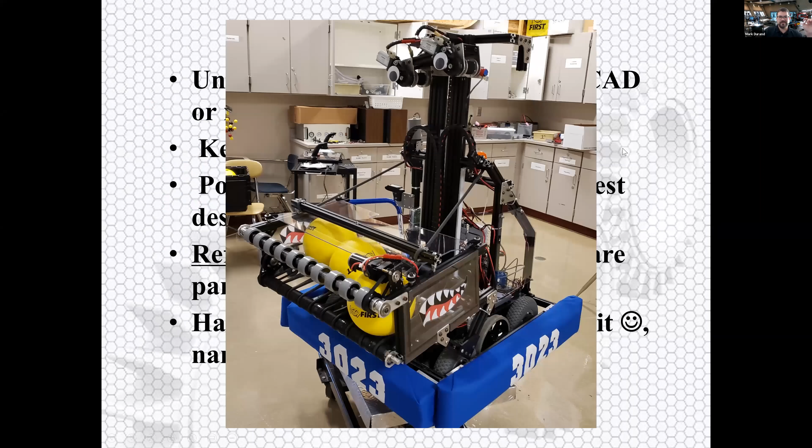The funny thing is, one of the people that I stole from, Bruce Whitfield from Team 2471, has a slide where he's like 'never use this for a launching mechanism.' And a few years later, his team did exactly that. So I think anytime we as coaches or mentors say this is not a good idea, our kids will prove us wrong, and sometimes intentionally work very hard at proving us wrong. But never say it's a bad idea, because I've seen teams go to championships with scissor lifts that my team could never build.

Yeah, it kind of depends on, well, yeah. I'll let some other people talk, but that's a good debate.